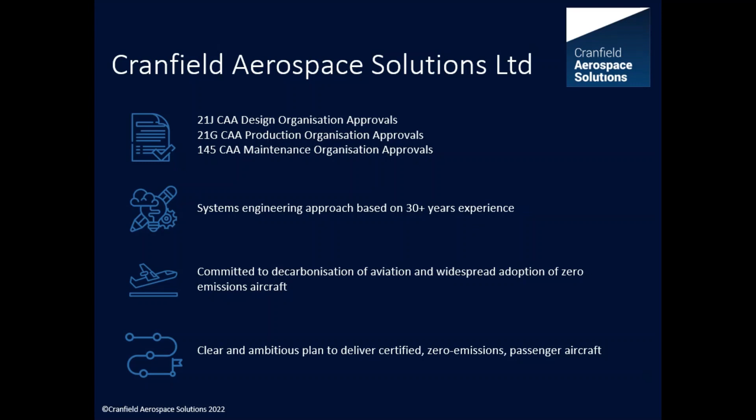So in summary, we've got the design, production and maintenance approvals, a systems engineering approach that allows us to apply any technology to any problem. We're committed to decarbonisation, and we've got clear, ambitious plans in terms of delivering certified zero emissions aviation into civil passenger flight. So that leads us to Project FRESSON, and this is the first phase of Project FRESSON for us.

And Project FRESSON is about designing, installing and testing a hydrogen fuel cell powered electric propulsion system into a Britten-Norman Islander. And the mission of the project is to deliver the world's first certified passenger carrying truly zero emissions flight. So it's a big mission. That's where we're heading: zero emissions passenger carrying flight.

To deliver that mission, we're a consortium, a very strong consortium made up of excellent UK companies. So for the first phase of FRESSON, which is a flying demonstrator, we'll fly a flying demonstrator in 2023. That's 50% government funded by the Aerospace Technology Institute and 50% private venture funded. And on the team for FRESSON 1, that demonstration in 2023, but also probably going with us on the journey to certified products in 2025, we've got a really strong consortium.

So our friends and colleagues in Britten-Norman are part of that consortium, and they're important because that gives us access to the OEM's understanding of the aeroplane and the OEM's data. So Britten-Norman are working with us on this project, and that's key to us.

The next part of the consortium is Ricardo, an internationally renowned engineering consultancy with great expertise in automotive and rail, and they bring to the consortium the expertise in hydrogen fuel cell systems. So the hydrogen fuel cell system, which is the fuel cell stacks and associated balance of plant, as a subsystem of our FRESSON propulsion system, has been designed by Ricardo, and it's excellent to have them as part of the consortium. They're first-rate engineers. We like working with them.

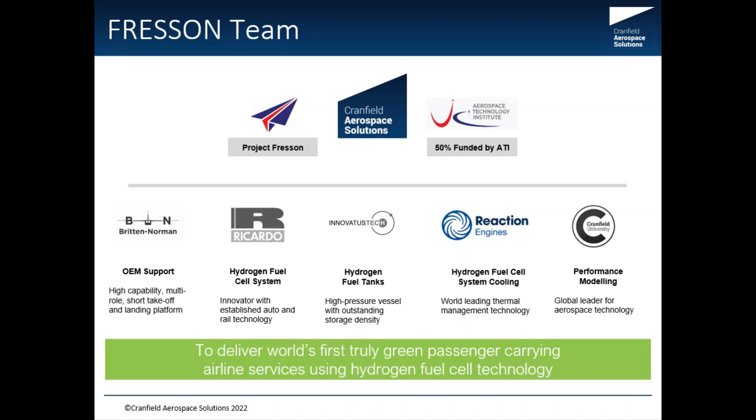And of course, we're on the Cranfield campus. We share a common home with Cranfield University, so Cranfield University themselves are participating and giving us access particularly to performance and control modelling and other modelling type services. So that's the consortium, all unified behind that vision of delivering the world's first truly green passenger carrying airline services based around hydrogen fuel cell propulsion.

So that's all going to be fitted into an Islander. The question is, why choose the Islander? Why put a 21st century propulsion system into a non-21st century aeroplane, in the nicest sense? Well, it's a very successful aeroplane. In terms of engineering suitability, it's just right for us; it's about the right power that we need.

I'll talk about power later on. It gives us about the right available mass in the aeroplane and real estate or packaging volume in the aeroplane that we can fit our propulsion system in there. So from an engineering point of view, it's right. And also from an engineering strategy, it's the right thing to do, because we faced a choice.

Do we go straight to a whole new design of zero emissions aircraft, clean sheet design, or do we do the difficult bit, the zero emissions propulsion system in an established aircraft, learn and develop that zero emissions propulsion system, and then make it scalable and modular, and later apply it to a whole new aircraft design. And you see we've adopted the latter approach. So we'll do the propulsion system first, then we'll apply it to other aeroplanes later. So having an existing aeroplane was good for us.

And then in terms of the commercial strategy, as I mentioned, we'll fly a flying demonstrator under permit to fly in 2023. Then we'll do a design iteration and fly a product in terms of modification certified as a supplemental type certificate, as an STC, in 2025, and we'll take that to market.

So working in conjunction with Britten-Norman, we'll offer that as a retrofit modification to current Islander operators, or it could be applied through Britten-Norman's aircraft refurbishment and reselling programme, or it could be offered as a modification for new build Islanders, so it breathes new life into the Islander product. And that is a big enough business for us to make it a commercial business as we move to being a product-based business, because the market is out there.

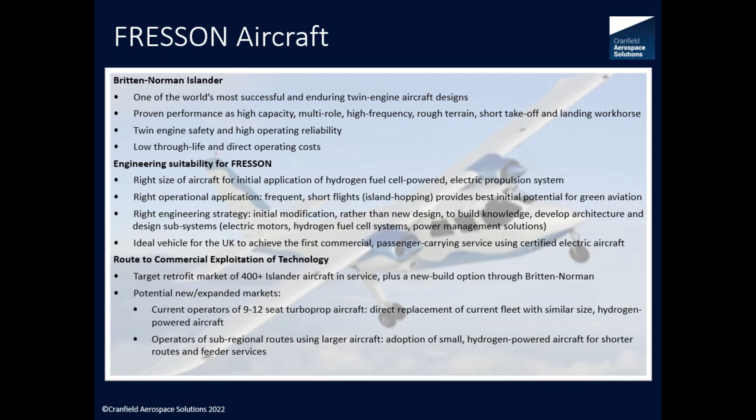And that'll be for existing Islander operators. It'll be for operators of other aircraft of a similar size who need a zero emission solution when their hydrocarbon fueled aircraft are legislated out of existence at some point. And it'll also probably have conquesting markets where operators disaggregate their large routes and larger airplanes into potentially smaller aircraft if they're available with a zero emissions propulsion system. So that's why the Islander.

And then the big thing is, why did we go for hydrogen fuel cells? Why not batteries? Why not some other system? And this was a process of several months of clinical engineering assessment, properly thorough mission analysis based on the competing technologies. So we took a number of use cases from various potential and current Islander operators and generated some reference mission sets in terms of mission profiles, so durations, ranges, cruise altitudes, generally 3 or 4 key missions that an Islander type aircraft performs. We then generated a number of different propulsion system concepts to test against those mission sets.

And they are based largely around, we looked at battery only initially, but battery only doesn't give you sufficient range for the Islander type use case. So that very quickly ruled itself out. And then we looked at hybrid electric type propulsion systems. So something with an engine driving a generator, either to top up a battery or to use it in a hybrid sense, a bit like in a motor vehicle. And we looked at gas turbine driven generators, piston engine driven generators as well, in either 1 or 2 generators per aircraft, so single range extender or double range extender. And we also compared it with hydrogen fuel cell as a means of generating electrical power to drive the motors.

And we ask ourselves 3 key questions. First key question is, can it be better than the existing baseline aircraft? So the Islander BN2B26, 260 horsepower Lycoming engines, avgas fueled. Can it be better than that aircraft in terms of cost per passenger on each of those reference missions, and also emissions per passenger on each of those reference missions? And we did it per passenger because that took into account the mass differences of the different systems as well. So can it be better than the existing aeroplane?

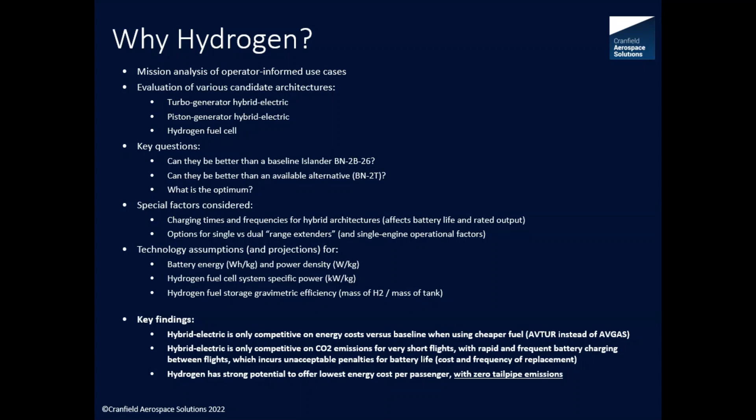We didn't see a future in battery or hybrid electric, but we actually think this is the way to go for this aircraft. So that was the why hydrogen. And so that leads us to the FRESSON concept.

So we said, let's take a baseline Islander and let's make sure we maintain the baseline aircraft's takeoff and landing performance, because it's a STOL aircraft. That's the unique selling point of the Islander. That's why the operators use it. We also said, let's keep the climb and cruise performance the same for similar reasons. Let's define a practical endurance and fuel reserve.

But we know with hydrogen fuel cells, I'll explain later, we can't get the amount of fuel onto the aircraft as we can with avgas or avtur. We can't do that, but we can at least define something that is realistic. So our baseline assumption initially was an hour's planned endurance and 45-minute reserve. That hour's planned endurance is a lot less than a baseline Islander can achieve, but it still covers 80% of the use case of Islanders, so it's still okay.

We set ourselves a goal to keep the maximum takeoff mass the same, because we didn't want to do any large structural modifications to the aeroplane, and we don't want to get into the death spiral of heavier aircraft, more power, more fuel consumption, and move away from the optimised point for the aeroplane, and also maintain the cabin volume so we can keep passenger space because it's a revenue earning aeroplane.

So we set ourselves that as the concept, and then the idea was, well, how do we do it? And it's very easy to say in summary. So the concept is based around, we remove both piston engines from the aeroplane. So remove and discard or sell off those two piston engines. We remove the conventional liquid fuel system completely.

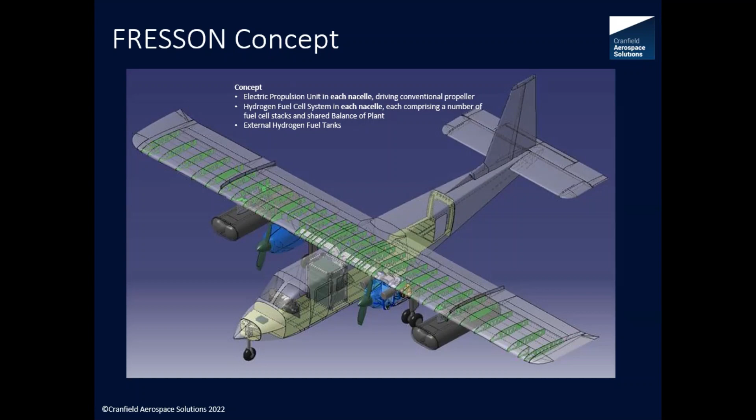We've also got new controls. So if you imagine the pilot's throttle box in an Islander is 2 throttle levers, 2 RPM levers and 2 mixture levers. We're retaining the current throttle levers in the same quadrant with the same intuitive operation, but instead of being throttle levers for a piston engine, they become power demand levers. But similarly, they operate in the same manner.

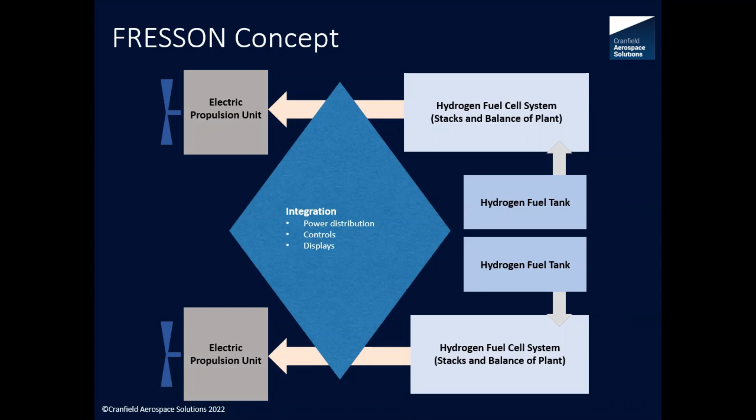So that's the architecture. The key requirements which we are covering, some of them you'd expect anyway. So in airworthiness and certification terms, and therefore safety, that's the top of the requirements list. So as I say, the demonstrator will fly next year, 2023, and that will be flown under a permit to fly, supported by flight conditions and an appropriate safety case.

And then in 2025, after further design iteration, we'll fly a product, the retrofit modification, with that system to fit to an existing Islander, under a supplemental type certificate as a major and significant modification. So it's major and significant, so I have to go through the CAA for this, but it retains the existing type certificate, and that's been agreed with the CAA. So our product is a modification.

As I say, we've set ourselves a requirement of maintaining the Islander's stall performance, and we have to meet single engine inoperative climb requirements as well. We're keeping maximum takeoff mass, maximum landing mass within current limits, so we don't have to embark on huge modifications to the structure or depart from the optimum position of the aeroplane.

The zero fuel mass will go up because the fuel mass on this aeroplane is a lot less than you'd expect from conventional wisdom from normal liquid fuel. So in terms of fuel mass, for a demonstrator, we're talking about 23 kilograms of usable fuel total. So the difference between maximum takeoff mass and maximum zero fuel mass with passengers is only 23 kilos.

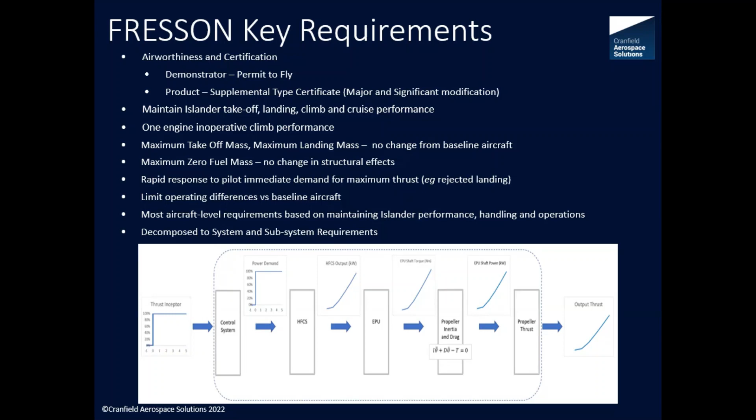In our favour, the electric motor is very responsive because you get maximum torque at low power, almost from zero RPM. So that's one of the areas where our requirements are going to be very carefully written and then traced all the way through the system to make sure we've got something that in the end is viable. And that's probably the area where we need to be most on it in terms of our modelling and testing later in the programme. And then we derive a number of safety requirements down from that, as you'd expect. So in terms of safety and power output and power response,

and mass. So we take that, and this is a systems engineering task from an aircraft level set of requirements to a set of requirements for the propulsion system to a set of what we call subsystem requirements. So, for example, for the hydrogen fuel cell system and the EPU, and these requirements documents run into the hundreds of lines, including things like efficiency, because efficiency is fuel consumption, so is range and endurance. And I'll say we're range limited because it's an inherently heavy system, but also efficiency is about heat rejection in the system and adds to our thermal challenges, which I'll mention later.

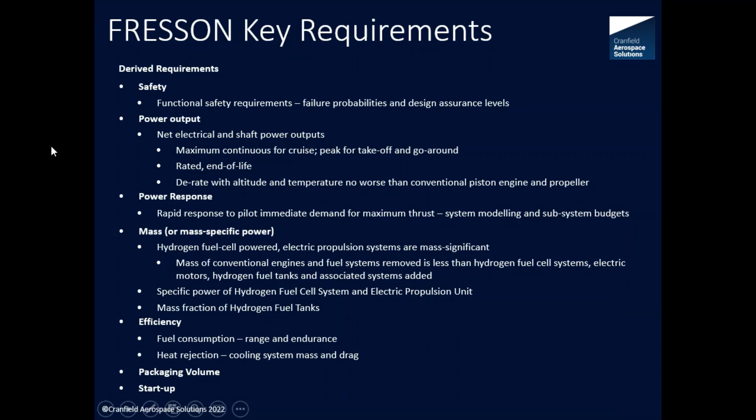And then packaging volume, because these systems are really quite large. And then also we've got some quite detailed requirements on startup, because the startup sequence for the hydrogen fuel cell system, then to start the EPU, is that bit more complicated than for a piston engine. And for example, we think we need something like 1.5 kilowatts for 30 to 60 seconds to get the hydrogen fuel cell system up to a self-sustaining situation. And we need to start on the ground, ideally independent of ground power, and clearly an airborne restart if needed. So we've done that systems engineering work, but it's that bit more complicated than we might expect for effectively a change of engine. And that's what's exposed the design challenges.

So why is this difficult? Well, why can't we, mechanical engineer talking electrics here, why can't we just buy some electric motors, buy something that generates electrical power, stick it together, put a throttle on it, put a control on it and make it work? It's more complicated than that, because we find the interacting nature of fitting a novel propulsion system into an aeroplane makes it more complicated.

So in terms of mass, these systems are inherently heavier than the systems we're removing. So for example, we're removing about 150 kilograms of engine and fitting well over 200 kilograms of replacement equipment in that nacelle. So they're inherently heavy. As I mentioned, the maximum zero fuel weight is much higher. The actual fuel is a much smaller proportion of the overall mass of the aeroplane. So heavy systems to deal with. We've got to be scrupulous in managing our mass and setting demanding targets of our suppliers. System efficiency is very, very complicated.

So it's somewhat more complicated than fuel comes in, engine turns propeller, thrust comes out, because of the number of conversions and the number, particularly not so much of sources but sinks of energy through that system. So we've traced that as a budget and through a Sankey diagram that shows the energy flow from input chemical energy to output in terms of kinetic energy of the aeroplane, and every loss and transition of energy has to be tracked, because we don't have surplus power budget, and it's also then generating waste heat if it's lost power. System responsiveness I've mentioned already, and then thermal management. So thermal management is the Achilles heel of hydrogen fuel cell based propulsion systems.

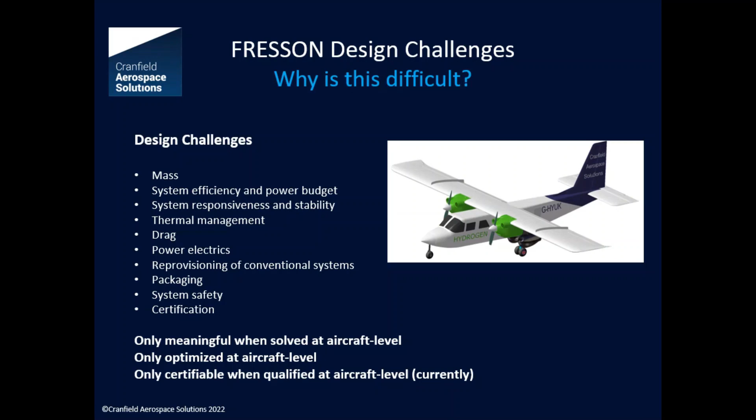And why do we think that's clever? I'm not going to go through the V model, so the classic systems engineering V model of requirements, development and validation, and then design and implementation and verification up the other side. I would suggest that with conventional systems, the left-hand side of the V is largely based on custom and practice and experience. If you're designing conventional systems and subsystems going to conventional aeroplanes, this is circumvented or accelerated by experience. But this experience doesn't exist.

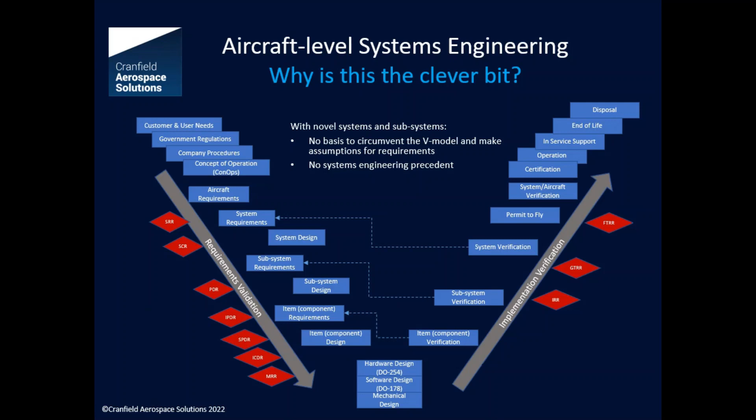And some of these systems we're using are automotive systems or coming from companies with automotive background like Ricardo. So we're having to do this full V model scrupulously to get to a system that we can validate we're building the right thing and then verify that we've built it right. There's no basis to circumvent that. So that's again why we think taking our whole aircraft integration approach is actually going to give us success, and some people who are looking to do it in a different manner may not have the same success.

And back to the system diamond again. So it's that integration, that diamond in the middle, as I mentioned, that pulls it all together, and we're finding that's actually what's delivering the performance that we need, the mass that we need to get us within target for mass, the safety because it's a system as a whole, and therefore it's what's making it certifiable, and then will lead to certification in the future.

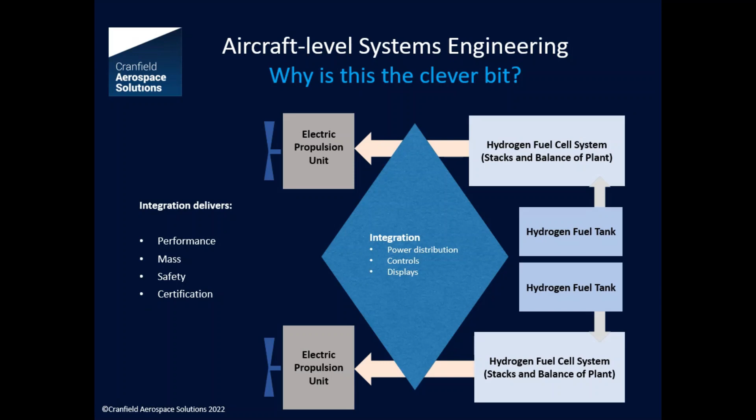And therefore, there are some examples of what we're learning. So I mentioned the thermal management challenge, which was we have really got a problem here. So as I say, the level of heat rejected by a hydrogen fuel cell is similar to a piston engine, but it's high heat, low temperature, and not rejected as exhaust gases. With that 2.5 square metre radiator, we couldn't have flown, we didn't have a solution this time last year.

But now, having scanned the state of the art in terms of heat exchangers and then teamed with Reaction Engines, we've now got a win-win. We get the right solution we need, they get to come with us on the journey and make their technology certifiable so that it can be sold for other aviation applications. So we've solved that, and it's only by taking the approach we've done that you expose those and then solve them in a manner that's viable.

Similarly, electrical architecture. So I mentioned this complicated electrical system from fuel cell stacks to motor windings. That's very heavy, that's very complicated, it generates loads of thermal and packaging problems.

We've come up with some innovation in there, which I can't show you the detail of, but we've changed that process to save a huge amount of mass. So the graph on the right is our history of mass over the last few months, and last autumn, against a maximum takeoff mass of 2,994 kilos, just under 3 tonnes, we were 350 kilos over that, with a combination of the amount of electrical hardware we had to fit in there, plus other factors.

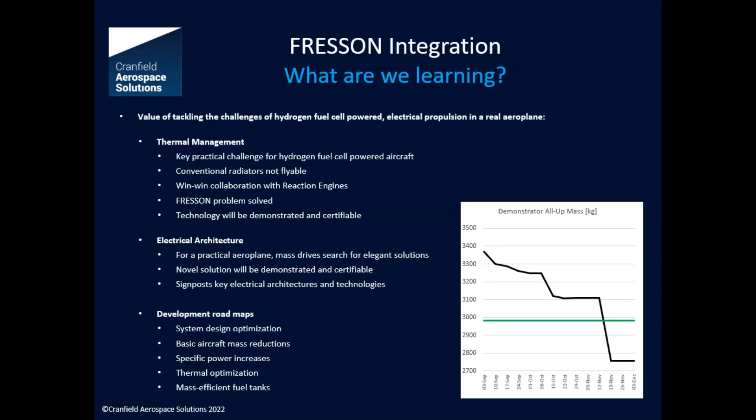It's part of an initial project, so it's 2023 demonstrator, 2025 products, but it's also a means to an end, because that will give us an applicable, scalable hydrogen fuel cell system that we can then apply to a larger aeroplane, either by scaling up the system or by installing more than 2 systems in a larger aircraft, and that will give us somewhere to go.

This is all so far fueled with gaseous hydrogen, because that's going to be an available fuel. But at some point we'll need to move to liquid hydrogen, because you change the challenge from being a high pressure tank, which is very heavy, for gaseous hydrogen. The challenge for liquid hydrogen is one of insulation, to keep the liquid hydrogen at a low temperature and limit the boil off to gas. And volumetrically it's much more efficient.

So there will be a transition eventually from gaseous hydrogen to liquid hydrogen, partly driven by size of aircraft, but largely driven by availability of the fuel. So by the time we've entered market and established our track record with this gaseous fueled hydrogen fuel cell system, liquid hydrogen will have caught up, and in the next generation we'll probably have liquid hydrogen fueled.

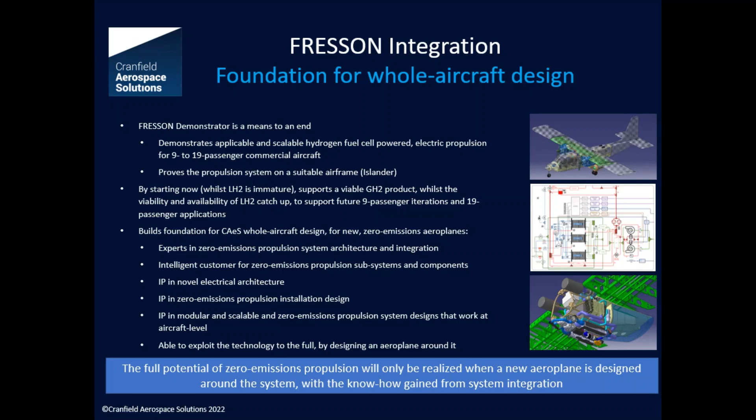But design rules like that are the lifeblood and the real value of the established airframers, and we'll have that book of how to design the hydrogen aircraft before most other people. So we will develop this, and then we'll go further, because we can see this will get us to market, but the true potential of the hydrogen fuel cell powered electric propulsion system comes when you can design an aeroplane around it as well, so it's fully optimised for that.

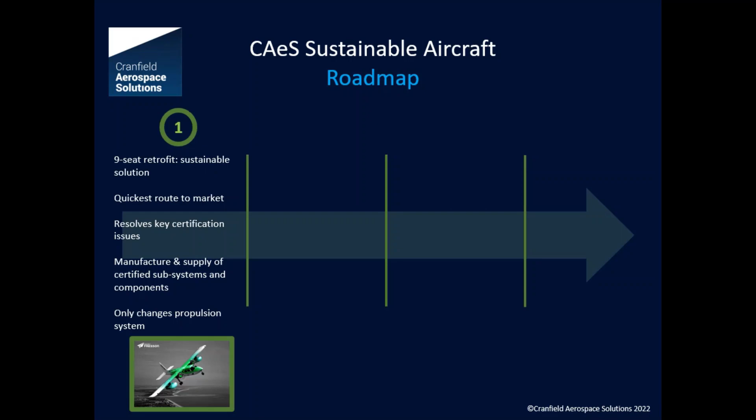And that's where we're coming towards one of my last slides now, in terms of our roadmap. So this will all be about FRESSON phase 1, which is the hydrogen fuel cell powered electric propulsion system for the 9-seat Islander, demonstrated next year, product in 2025. Gaseous, that allows us to solve the fundamental problems, develop the expertise in that form of propulsion, and also give us a marketable product.

Following on from that, we're going to apply that technology, scale it and modularise it to fit into a larger aircraft, something of a class of 19 passenger. So something like a Twin Otter or a Cessna Caravan, but not necessarily either of those. We haven't selected yet. These all have their advantages and disadvantages. But effectively, take what we've learnt with the Islander, apply it to a larger aeroplane, which is a different and larger market. It's FRESSON phase 2.

And we're at the stage at the moment where we're gathering and developing those top-level aircraft requirements for FRESSON 2. FRESSON 3 is when we start getting really ambitious, and we take our propulsion system that we've proven in the 9 and 19 passenger applications, and we design a new aeroplane around it, because that's when you really get the benefit of the propulsion system, rather than fitting the 21st century propulsion system into a 20th century aeroplane. And our chief executive likes to say, you just design an aeroplane around it. That's easy, isn't it? Okay.

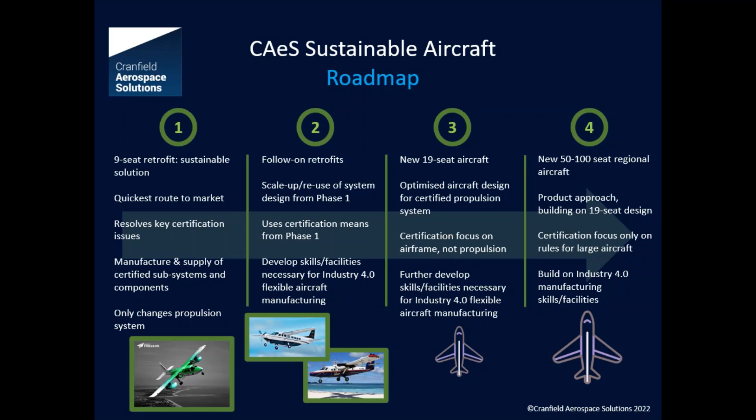So we get ambitious then, and that may well be with partners, because we see ourselves as an airframer and integrator. And then beyond that, to apply it to a larger aeroplane. When we get to that larger aeroplane, by that time the cut-off between, is it hydrogen fuel cell systems or is it hydrogen combustion? It's almost certainly liquid at that stage. So this is a multi-year strategy for the company and for zero emissions propulsion. But FRESSON is the first step.

So that was my last slide, and that's what I've covered. Cranfield Aerospace Solutions and where we've been, but where we see ourselves as an airframe integrator for zero emission propulsion. The FRESSON mission is to bring the world's first certified, truly green passenger carrying services, with the products being in service in 2025. The team is part government funded to demonstrator, but it's largely private venture and will be private venture funded to product. And it's us with a really strong team with people like Ricardo, Reaction Engines, Innovatus, Britten-Norman and Cranfield University.

The aircraft for FRESSON 1 is the Islander, because it's the right size of aeroplane, it's the right market opportunity for us. And why hydrogen? Because it's the only way you get truly zero emissions flight with a good business case behind it, a very strong business case actually for operators. The concept is quite simple. We get rid of the piston engines and their associated fuel system and replace them with a hydrogen fuel cell system in each nacelle as the power station, providing the electric power to the motors to drive the propellers.

And then it's all about the aircraft level integration, which is where we think the real value is coming, and the learning we're getting from that and what we're going to apply to the larger systems. And that's part of a roadmap that takes us 9-seat, then 19-seat retrofits, and then 19 passenger new build and then something larger. And that's my last slide and an opportunity for questions.